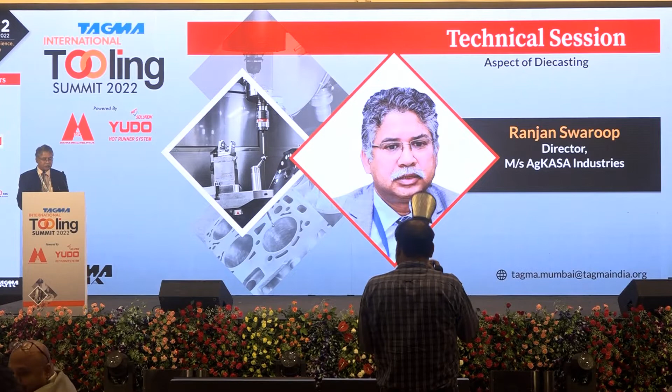So, good evening to all of the august gathering. I'm thankful to TAGMA, President TAGMA and EC, especially Mr. Amit Parashar, who invited me to speak on aluminum die casting. Last session I have heard about plastic molding, additive manufacturing, plastic mold life and a lot of things. So after lunch and after that learning session, you may be feeling some boring. I'll show you some high technology video representing AI, IoT, additive manufacturing, molding, materials, composite material, navigation, system integration.

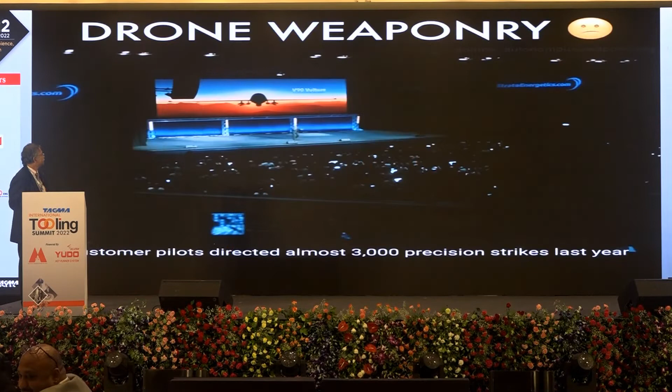Please play the video.

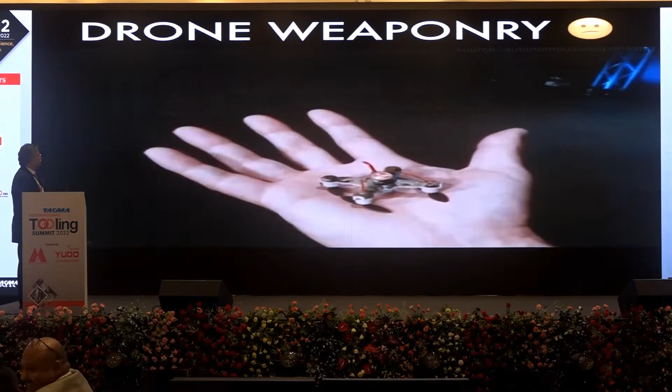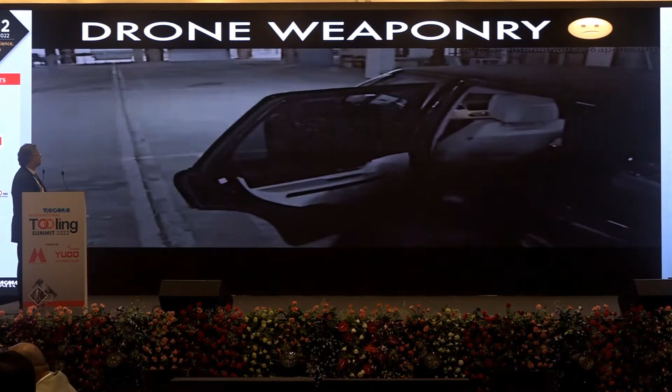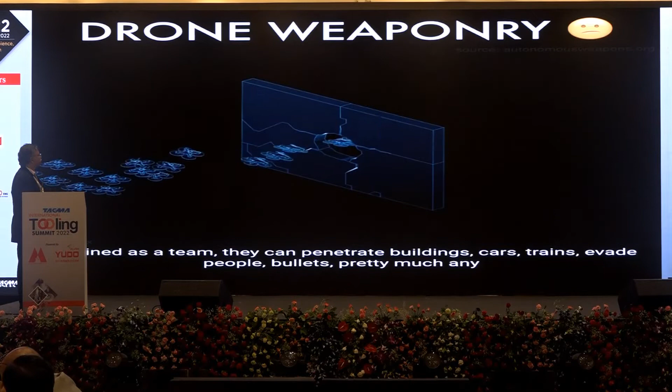Customer pilots directed almost 3,000 precision strikes last year. We're super proud of it. It allows you to separate the bad guys from the good. It's a big deal. But we have something much bigger. Your kids probably have one of these, right? Not quite. Hell of a pilot? No. That skill is all AI. It's flying itself. Its processor can react 100 times faster than a human. The stochastic motion is an anti-sniper feature. Just like any mobile device these days, it has cameras and sensors, and just like your phones and social media apps, it does facial recognition. Inside here is 3 grams of shaped explosive. This is how it works. Did you see that? That little bang is enough to penetrate the skull and destroy the contents. They used to say guns don't kill people, people do. Well, people don't. They get emotional, disobey orders, aim high. Let's watch the weapons make the decisions. Now, trust me, these were all bad guys. Now, that is an airstrike of surgical precision. It's one of a range of products. Trained as a team, they can penetrate buildings, cars, trains, evade people, bullets, pretty much any countermeasure. They cannot be stopped. Now, I said this was big. Why? Because we are thinking big. Watch. A $25 million order now buys this. Enough to kill half a city, the bad half. Nuclear is obsolete. Take out your entire enemy, virtually risk-free. Just characterize him, release the swarm, and rest easy. Dumb weapons drop where you point them. Smart weapons consume data. When you can find your enemy using data, even by a hashtag, you can target an evil ideology right where it starts.

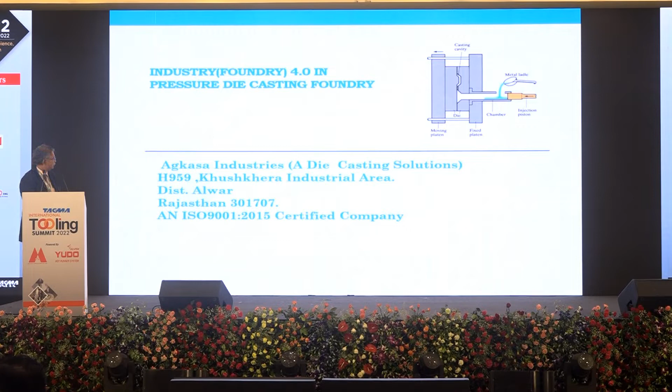So everybody has spoken about all four industrial revolutions: steam engine, then assembly, then robots, and finally cyber physical systems and smart factories. The word was coined in 2011 or 2012 in Hanover, Germany, and by 2015 it was at the World Economic Forum, it is being talked about much, and from 2018 it is being spoken of in India with high speed.

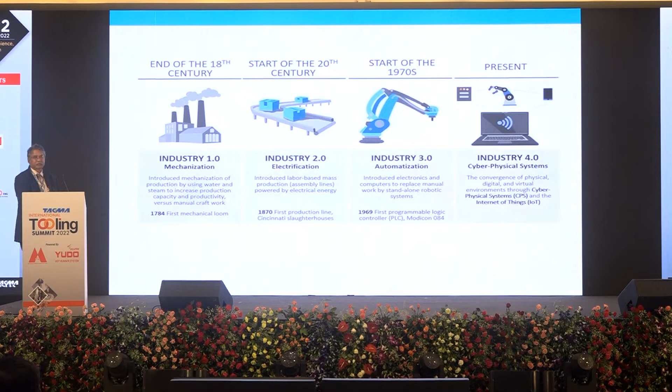But still many factories have not turned towards smart factories using cyber physical data and so many things. Still we are lagging behind in Industrial 4.0. I would like to draw your attention that Industry 5.0 is following us, and we are not even very near to Industry 4.0.

So these are the pillars or types of Industry 4.0 which I have shown in my video: system integration, autonomous robots, Internet of Things, big data analysis, where Mr. Paresh has spoken about big data, cloud computing, which has also been spoken about by Mr. Paresh. Additive manufacturing was highly spoken about, and machines were developed and parts are being made, which is highly recommended as well.

Cybersecurity is a very important issue nowadays for each and everybody, not just for industry, even for households. It is very important, and cybersecurity is such an important instrument because the power grid was hacked in India for a few hours, and then it was taken care of against the cyber attacks. So cybersecurity is very, very important for coming technologies and the coming future.

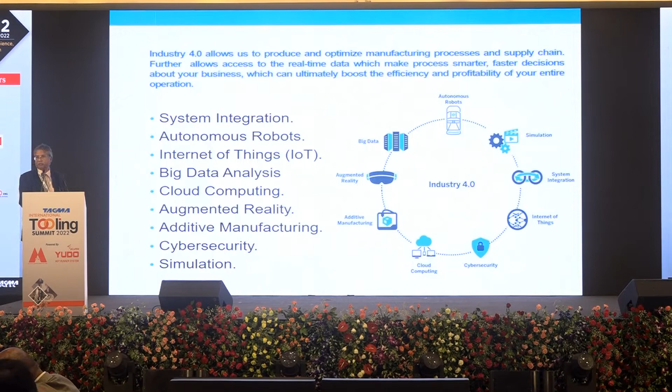And simulation has been talked about much in the last panel meeting. Simulation in plastic mold is being utilized and is now very common. In pressure die casting, simulation is also very much used nowadays, but my experience is this is only 60% correct. The rest 40% depends on your capabilities, your experience, and thorough discussion of the data and results released by simulation.

So digitalization of industry in Industry 4.0 is required to take a bottom-up approach, like SQDCME, that is safety, quality, production, delivery, cost, morale, and environment system.

I have already spoken about this. Somebody was speaking about Industry 4.0 not being common. Yes, for tool makers it is different, for plastic mold it is different, for packing it is different. One right solution does not exist. So everybody has to take care of the 9 pillars from Industry 4.0 and can devise it according to their use.

So I'm talking about Foundry 4.0. Foundry is considered to be a blue collar job, and still in the MSME area of India, automation is not very much—maybe 15%, 20%, maybe less than that.

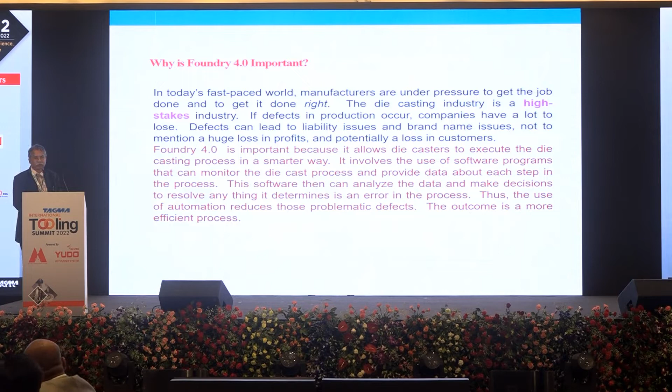I have spoken about profitability. Profitability can come only by applying small changes: automation, SMED, low-cost automation. Then the bottoms can be up and foundry can be benefited, pressure die casting can be benefited.

I still understand, even after simulation or CNC machine availability, die casting is still a black magic, still a process to be understood. Nobody can get up to 100% good products or okay production from pressure die casting. Blowholes are bound to come, and we need to do something in that area also.

So this automation drives us to better decisions, better parts, better margins, better profitability. So everybody, whether a small scale industry or even a bigger industry of 100 crores and more, die casting industries must go for automation in that area.

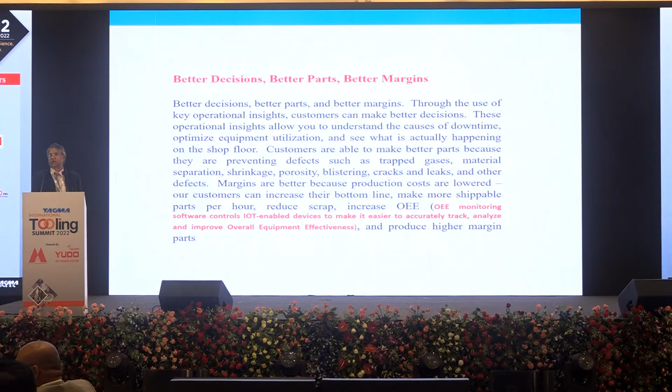I have experience getting training in Toyota, Japan, in a pressure die casting company in automation. I share my experience with you that they were running 2 molds on a single machine. The molds were changing in every shot. There were rails, and molds were going inside the machine. A sleeve was assembling into it, the shot was taking place, the sleeve was unassembled, the mold comes out, and the part is taken by a dummy die casting machine.

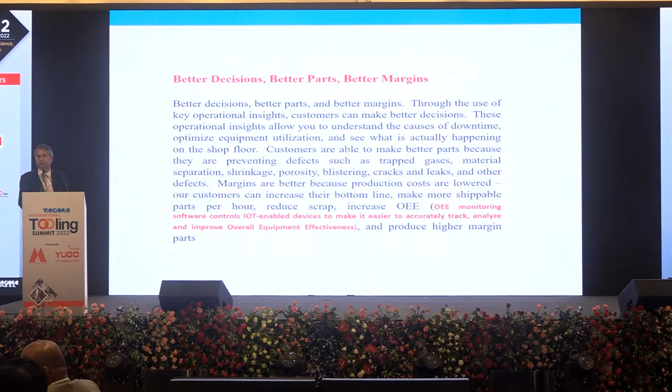That means the value-added activity, the role of the die casting machine, is to make the shot, and that is going to pay you, that is going to give you the die cast product value. But the die coat spraying or extraction of the casting is not the work of the machine. So Toyota has devised this machine, and that machine is still with them. This is not open to anybody in the world. They used die casting machine people and developed that kind of machine. Such automation was taken care of 10, 15 years ago. So we are far behind in that area.

So data, if we're talking, Paresh sir was talking about data science, and you can visualize on your telephone. All the data in a PDC or foundry can be taken care of, taken, and according to an algorithm can make some results. That result can be given to you, which you utilize and take decisions. So decision making can be easy if you completely take care of data through algorithm and through software and so many things.

So digital transformation, digital analytics - a lot has been talked about digital data analysis, digital science, and so many things.

So data analytics, once again, how does it work? Big data analytics, cyber physical systems, component-driven production, flexible production systems, and Internet of Things - all these 5 components work together and get you better results.

These are real-time definitions. If we get real-time data, like in pressure die casting components, whatever you produce, you get your results after or in your next process - what may be the internal defects. So real-time data, if we can get it in pressure die casting components, then it will be easy for us to correct the machine, to stop the machine from making defective products, which is nowadays not available anywhere in the world, I think.

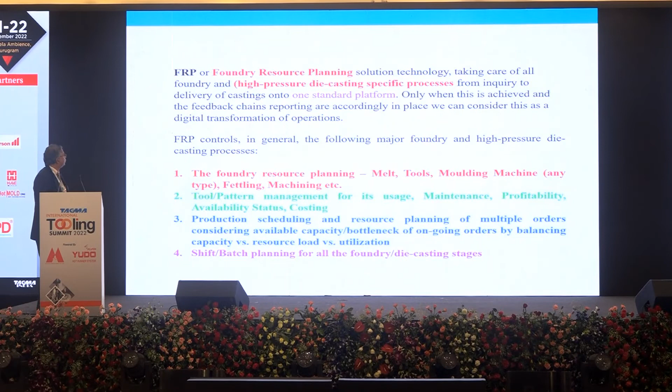So this is foundry resource planning. It's a part of Industry 4.0. This is the quality aspects.

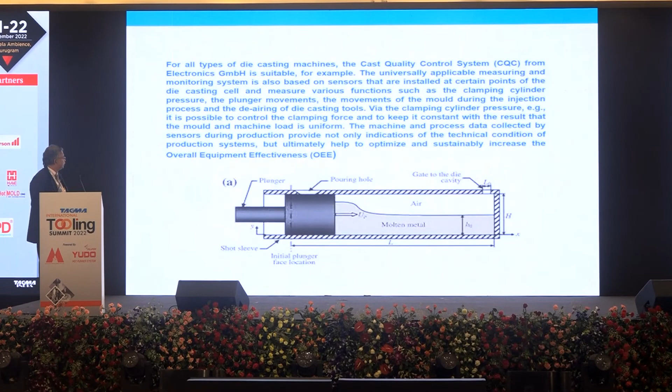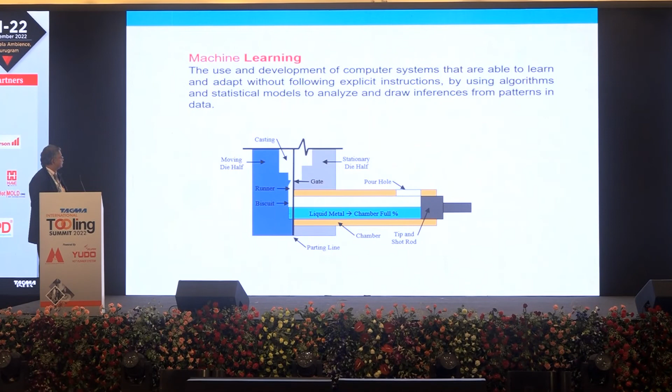So this is the die casting system I would like to discuss with everybody. All the theory and things I have just passed over to control my timings.

In a die casting cell, raw material comes, and this could be in an automatic cell. When you place that raw material near the furnace in a CNC die casting machine, there is a linear robot which can take your ingots and put them in the furnace. The raw material area will be monitored by load cells, by color coding, and other things, so that when raw material finishes, a notice goes to the RM supplier that raw material is being finished near the furnace. He will supply it - I'm talking about a complete closed-loop system in Industry 4.0.

The furnace part - it is melting in the furnace. There is a load cell, there is a level indicator which tells you how much quantity is in the furnace. And now the CNC machine, which is a complete CNC machine, will take care of complete feedback in the shots - the pressure, the speed, the level of all parameters, everything.

Now the casting is taken by a robot. The casting is extracted, and after casting extraction, the overflows are removed, and the casting is subjected to a press or a circular saw, so that the runners will be there, and the overflows will go back via reverse conveyor to the furnace again. There will be a sensor to monitor the return ratio of the metal with the ingots.

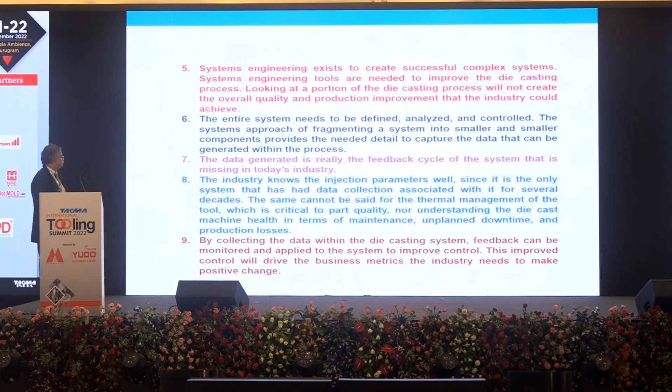So this is the end of my presentation. Thank you for listening to me attentively. If there is any question on die casting or anything, I'm ready to answer.

So no questions. Thank you very much.